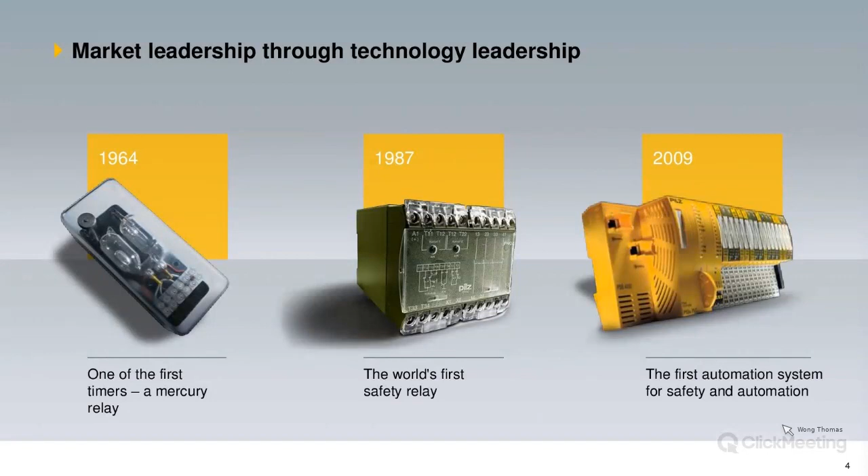For Pilz Southeast Asia, we're based in Singapore at the German Centre, near International Business Park. We opened in June 2016, so we're only 5 years plus old, a very new company for this Southeast Asia side.

Okay, let's go straight to the topic - nobody should be in the statistics. As you can see from these slides, in the first quarter of 2021, there were already 38 major injuries and 3 fatal injuries just from the manufacturing sectors. For machinery incidents, there were 16 major injuries occurring just in the first quarter of 2021. And in the fourth quarter of 2020, there were 19 major injuries and 1 fatal injury occurring from this.

From 2020 Singapore statistics, there was compensation of Singapore 74 million for these 16,000 cases. We do know that one accident is one too many, so our objective is to reduce it to almost 0, if possible.

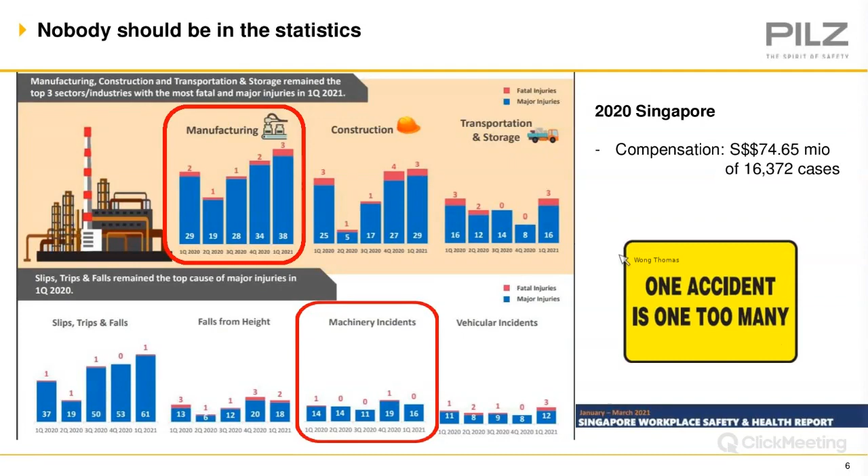So how do we get to this safe machineries and automations? We have a lot of hurdles, as you can see here. The first and most important hurdle is your risk assessment. After you've done your risk assessment, you move on to the safety concepts to design out or eliminate the risk, then design the actual system itself, followed by validation. You validate whether the risk is properly addressed and reduced, followed by conforming to your regulations, such as UL or CE markings. So let's move on to each of them.

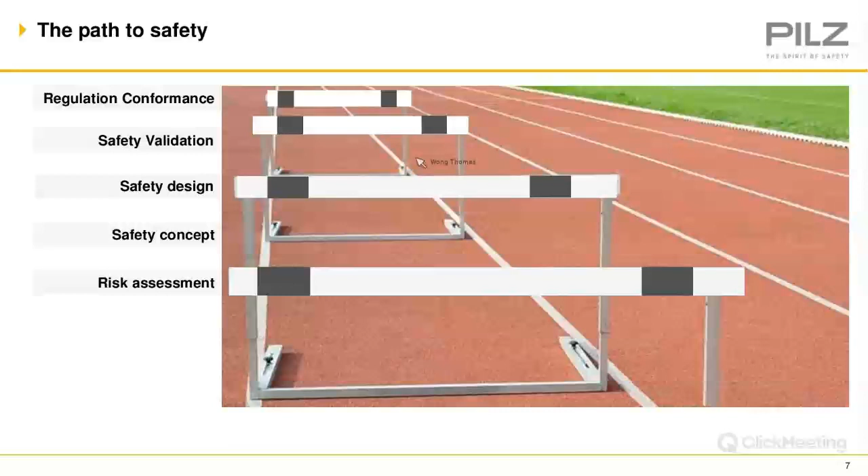Hurdle 1, risk assessment. The risk assessment must give attention to intended use. This is usually for task-based activities like teaching of robots, teaching of machineries, doing maintenance, settings, cleaning, etc. So it's not just the operator doing normal operations, it also depends on other tasks involved.

We also need to take note of unexpected startup, and we need to make sure we account for access by personnel from all directions. For example, you have electronic machines with an operator sitting there working on the product. However, you need to take note there could be people accessing from the side or behind him, and all this. So we need to take note of all risks from all directions.

And of course, any reasonably foreseeable misuse. Let's give an example of a machine with a light curtain installed. However, if the machine has a step by the side, a person could step on it and reach over across to the dangerous zone. To eliminate this, we could just remove the step that's built into the machine itself. So this is one of the ways.

To take note, risk assessment can be started when the machine is in the design stage. Actually, it's best to do it at the design stage, because you can eliminate or build your system safely from the start. This could eliminate a lot of additional costs to implement new or different kinds of safety measures for the machine. So it's always recommended to do it in the DRA stage.

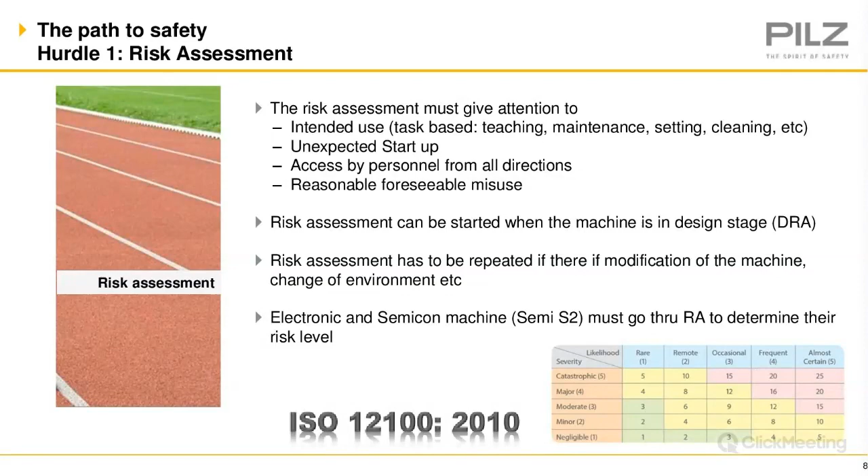The second hurdle, safety concepts. We have a few risk reduction measures that can be implemented. One, inherent safe designs. By doing good safe designs, you actually eliminate or reduce the risk itself. Some of the ways are to increase the distance from the hazard, such as having a conveyor belt deliver the items to the machine instead of an operator putting the product in.

Another way could be a modified design. For example, if the design was using light curtains or something too close, that should not be used, like for a semicon machine. They can instead have an enclosure design to make sure it's safe and prevents people from accessing it. Another way is technical safeguards, safety functions like guardings or SRPCS, which is your safety related parts of control system, following EN ISO 13849 for the performance level of these safety components, and ISO 10218-2 for the robot system itself, which is normally PLd and Cat 3.

So you do see some designs here for the guardings. This is an enclosure for a robot, and of course we have door switches, non-contact door switches, your e-stops, your safety controllers, and scanners, all of which can be used to provide the technical safeguard. The last but least recommended should be your information for use.

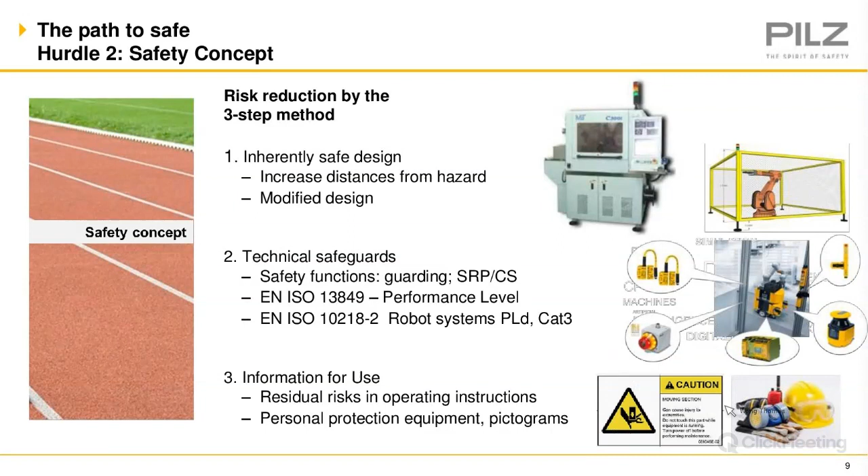So the next one, we are looking at human-robot collaboration according to ISO 10218 and also ISO 15066. There are a few ways for human-robot collaboration to work. One is by using a safety-rated stop: once you go into the zone, it will shut down the robot or stop it. The next is hand guiding using enablers, whereby you make sure it's safe by touching with an enabler in the other hand.

So there are two methods that are more popular now, which are speed and separation monitoring — I'll touch on this slightly more later — and also power and force limiting, which we'll also touch on slightly later.

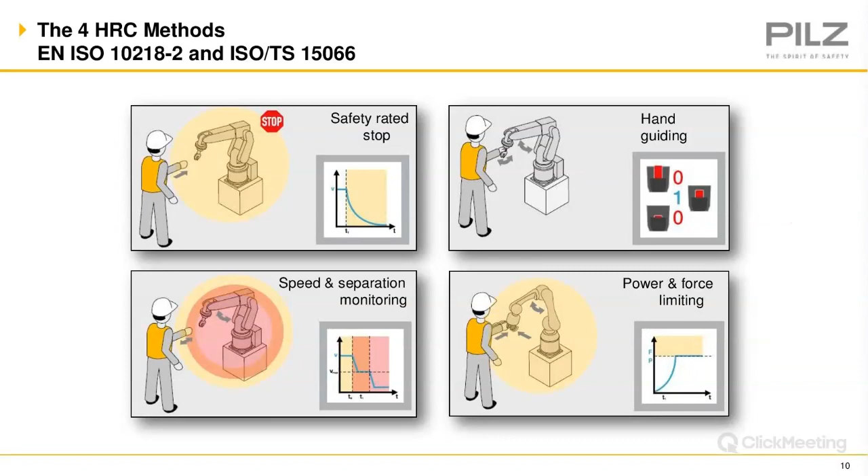Okay, for speed and separation monitoring, as you can see, there are different zones of different speeds. For example, a person walking into a danger zone — the yellow zone slows the machine slightly, followed by the orange zone another step further, and lastly the danger zone, where they push it to a very low operating speed. So this is one of the methods.

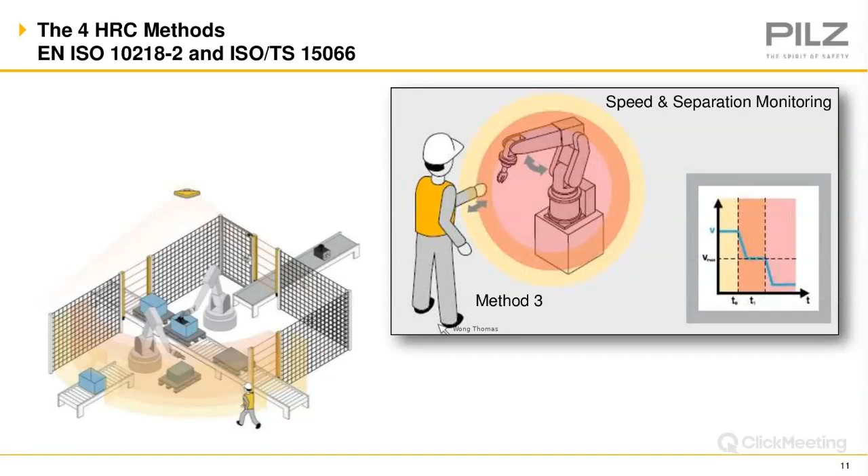The other method is the fourth method, which is power and force limiting. This actually allows collision to happen, so you can bang into the cobot itself. However, take note this has a limit on the power and force. There is a way to measure this, and later on we will touch on that as well.

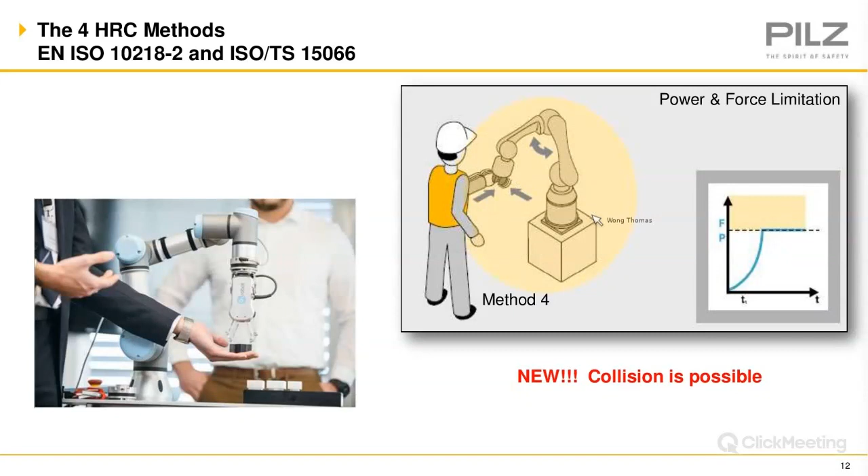Okay, so do you have a hurdle 3? This is your safety designs. Most designs are based on ISO 13849.

This is where you actually measure your performance level to measure the ability of the system to perform a safety function under foreseeable conditions. So what this means is that if the machine is more dangerous or higher risk, you need a better safety system to protect this machine from malfunctioning or breaking down, so that you can protect the person involved. Do take note, electronic and semicon machines actually refer back to this ISO 13849, so they must follow this kind of safety design.

So let's look at one of the ways to measure the performance level. S is the severity of the person injured — for example, this is dangerous, you can chop your hand or injure a limb, so it's actually severe. Then F is the frequency.

If let's say this is not so frequent, you only do it maybe once a year, so we put the frequency as low, which is F1. F2 is high, maybe a daily occurrence. Then the probability of this occurring — can it be avoided? P1 means you can avoid it, and P2 means you cannot avoid it under any circumstances. So let's put it this way: if ours is actually P2, you can't avoid it, so it will be a performance level D, the minimum requirement for your system level.

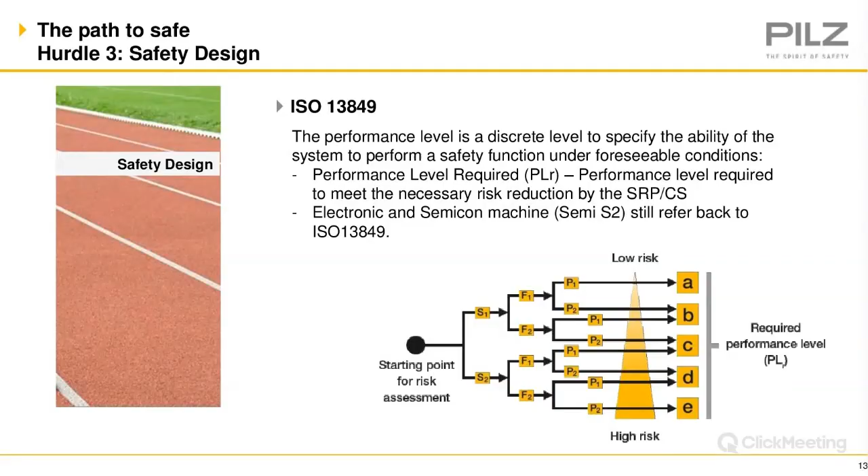So the performance level is a discrete measure of the ability of the system to perform the safety function under any foreseeable faults. It means the reliability of the safety control system itself. There are a few ways also to do this kind of architecture, so it doesn't mean you just have the idea of it — you need to design it out. So this is how you design it.

So this is a cat 3, and this cat 3 will be dual channel incoming, and then we have a cut off. There has a communication between the contactors itself, and also there's a feedback to the contactor. This is considered a cat 3. However, for cat 4, which is the highest level, you will have a dual channel for the incoming, and then you will have two contactors communicating to both to cut off. So in case, example, one contactor fails, the other one can still cut off. So this is how a cat 4 system will work. So this is almost a fail-safe system.

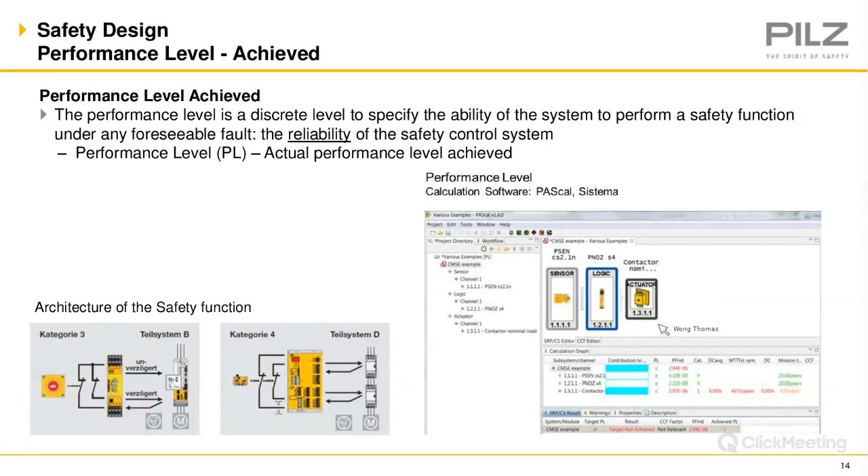And we do have a lot of software to actually do a measurement for this kind of Pascal or your performance level. So we have a software called Pascal and also a software Sistema. So this is a Pascal report. In here, you can see we have sensors, we have a logic, we have a contactor. So you can see that our sensors and our safety relays actually meet the requirement. However, the contactor itself doesn't meet the requirements. So a bit hard to see, but here is a target level, performance level is actually D. However, we can only achieve C based on this, so it does not meet. So meaning we must change out the contactor to something that's more suitable, or a dual channel contactor.

Okay, so we will move on to the hurdle 4 itself, is the validations. So validations includes post-measure risk assessment. This is to measure, after what you have done the risk assessment, is it meeting this? And then safety function assessment, which is your performance level achieved, and also your stop time measurement, this kind of measurements itself. And of course, we have to also validate the software.

So this is software validations, which is your safety PLCs and your safe robots. And we do need to take note of the installation of safety relevant components. And if the safety system is modified, a validation is needed again. Please take note of that. So for this, you can see this is a safety installation and fault validation kind of a report from Pilz. So that's what we do.

And also, how do you measure stop time measurements for a robot? So we have a light curtain here. A light curtain has a response time, and to link to a controller, there's some response time as well. And the safety controller also has a response time and links to your driver of your robot controllers. And lastly, to the robot, the stopping time of the robot. This whole thing is actually your stop time measurement. So we need to make sure the light curtain is placed a safe distance away from this robot that allows it to have time to actually stop before this person can actually reach the robot itself. So this is what we call a stop time measurement.

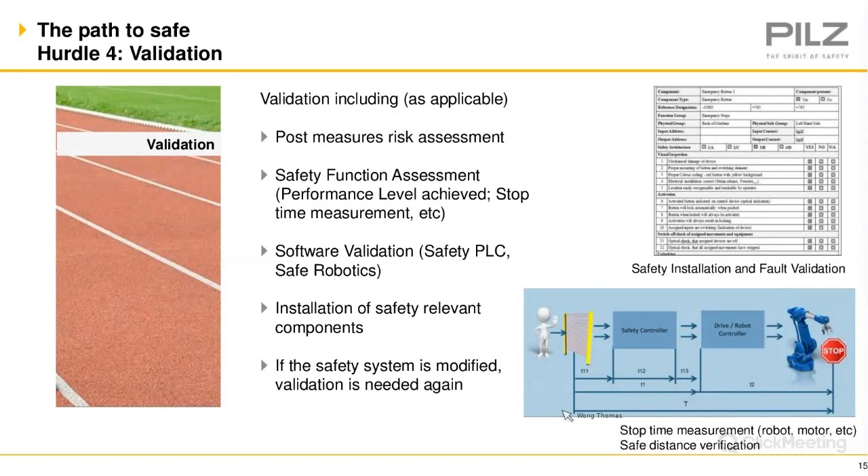Okay, just now we mentioned the validation of HRC, human robot collaboration. So we do the last method 4, there's a collision allowed. So it's based on this ISO 15066. Based on this, they allow collisions. So imagine this is a robot arm. The robot arm on collision will activate the fail-safe limit robot when it reaches here, and it will definitely stop when the robot reaches here. So this is the limit of the robot. So by this measurement, if it's within this threshold of ISO 15066, it's allowable. However, if this measurement is higher or exceeds this threshold, then you just need to calibrate to a lower level for the pressure and force of this cobot itself to meet the requirement. We will have a device data that I will touch on, which will show you how to do this.

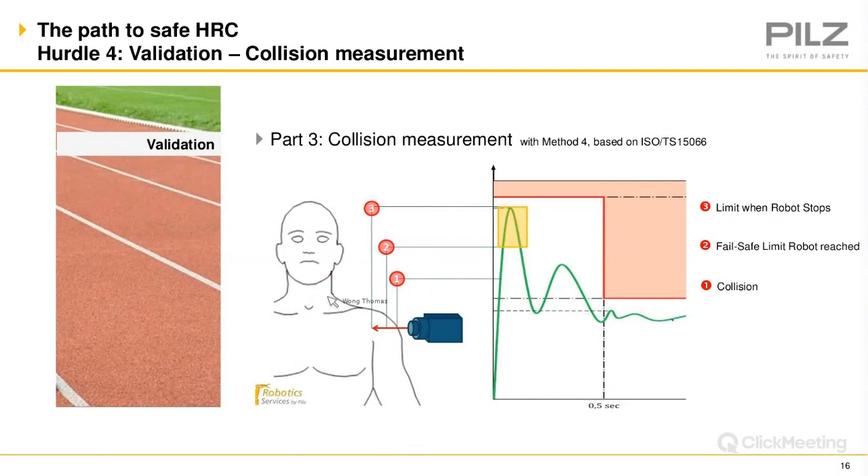So just now, we just went through the safety life cycle. So from application analysis to your risk assessment, to your concepts itself, to your designs and also implementations. And also, we need to have some markings like CE markings or UL or whatever certifications. And lastly, we need to make sure we also provide training and technical support as well. So this is the complete life cycle of safety.

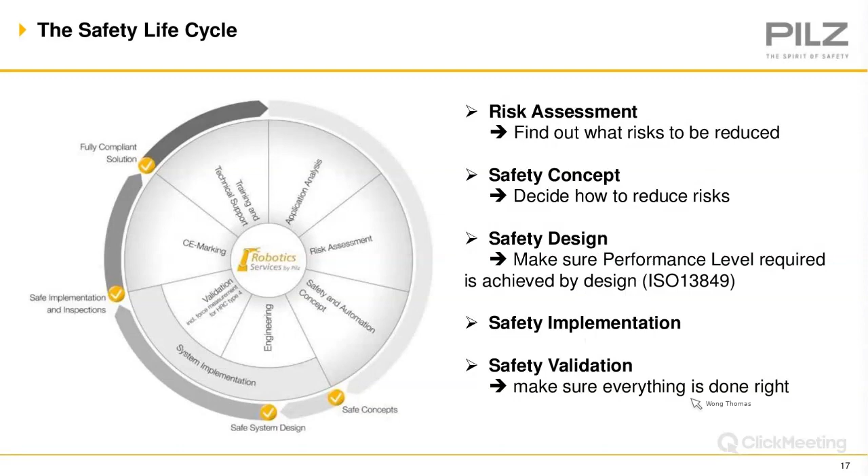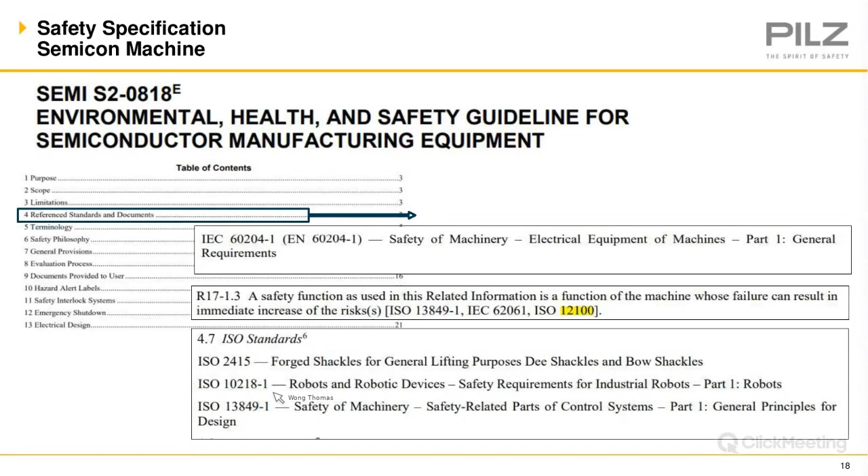Okay, just take note that for this semicon machine itself, the Semi S2, they are in reference to also our ISO or IEC standards. So IEC 60204-1 is one of them. And then we also have 12100 and also 13849 and 10218 also mentioned in this Semi S2 standard itself.

Okay, so we have two questions. One, we implement all safety measures - cobot, e-stop, safety sensors, guardings - do we still need to do risk assessment? The answer is actually yes, because risk assessment is the starting point of all measures. Without knowing the risk itself, you will never be able to implement the safety measures. So we always need to do a risk assessment regardless of whether you are trying to implement any safety measures.

Why do we need to use safety components? Is PLC and normal automation components not safe enough? The answer to this is yes and no. Why no? Because sometimes during the risk assessment, we assess that the machine is very safe - it's performance level A - so we do not actually need to use any safety components. However, if we do a risk assessment and find that it's performance level D, you will highly need to use a safety component because you could not achieve this with a normal PLC or normal automation component.

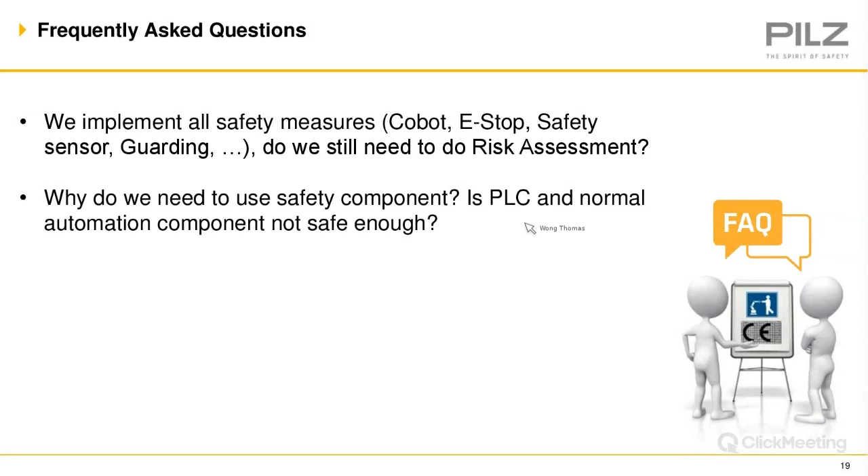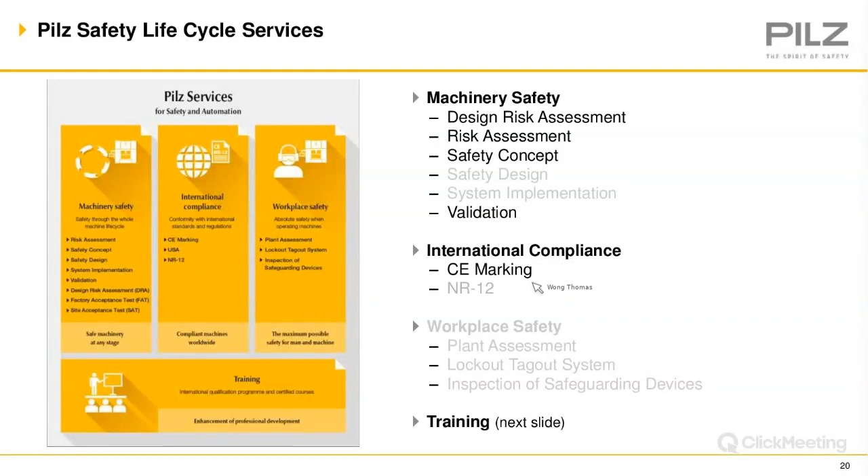So what does Pilz do? We're actually able to provide you some of these services. This is one of the services we can provide, which is your design risk assessment, your risk assessments itself, your safety concepts, and also your validations. We are able to do all this, and even CE markings - we are able to do CE markings as well, and trainings.

So we do have some trainings here. We've got fundamentals of machinery safety, we've got also risk assessment for your fundamentals - this is the more popular course. For advanced, we do have the design safety designs like ISO 13849 - this is one of the popular courses as well. And the most popular course will be your CMSE, your Certified Machinery Safety Expert course itself. This one is actually internationally recognized and issued by TUV Nord, not by us.

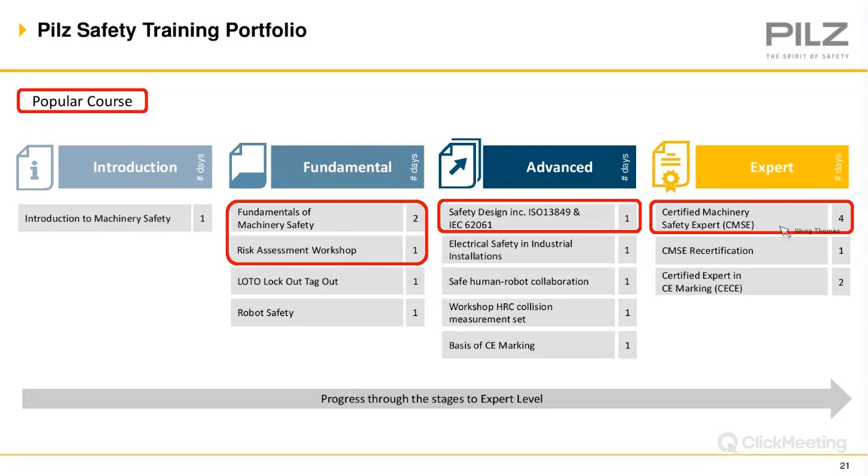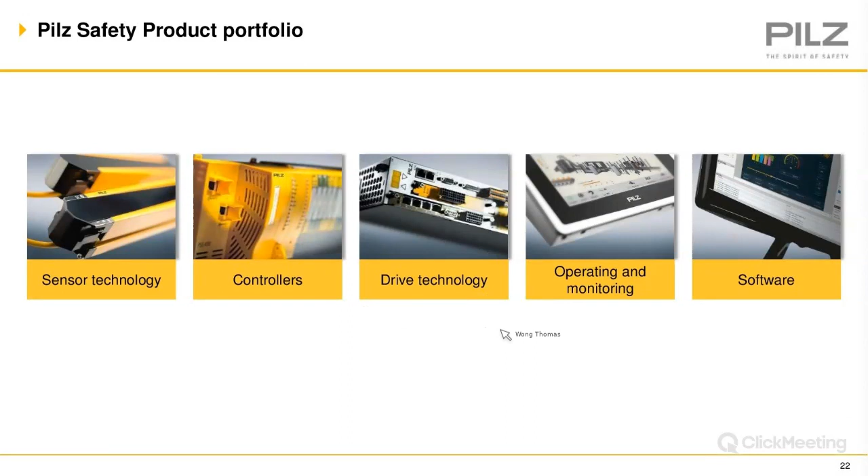For our product base itself, we have sensor technologies, your controllers, your drive technologies, your operating and monitoring systems, and also your software.

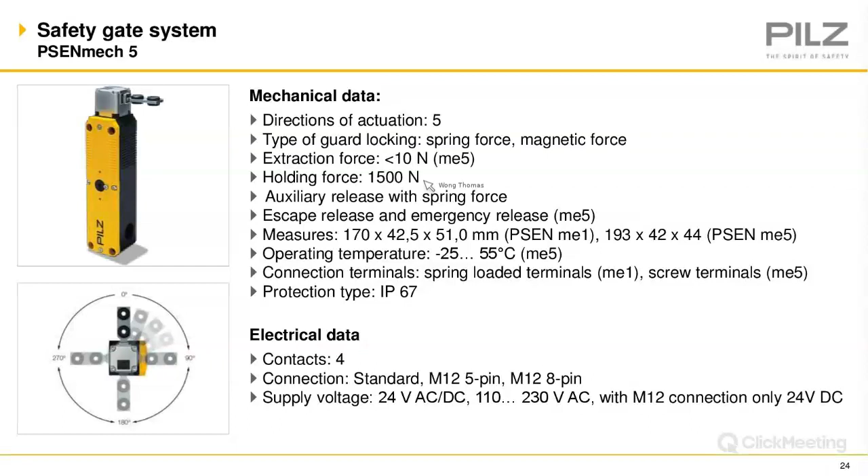We will touch more on this newcomer - this is our PSEN ME5. So this guy is one of our better sellers, and actually has spring force and also magnetic force up to 1,500 Newton of holding force itself. So this is something we are promoting.

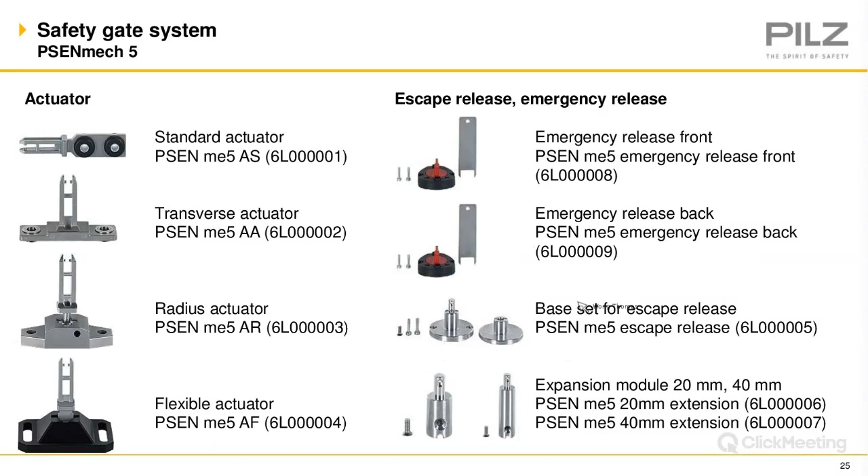They do come with a lot of actuators, as you can see here, from your standard actuators, your radius actuator, and also we've got escape release and also emergency escape. So there's a lot of accessories that it can be used on.

And we do have some application stories for this ME5 itself. My customer is actually building many low-level machines for electronic and semiconductor industries. They've been using our competitor's O brand for the door interlock for many years. After testing our door locks, they're extremely happy with it. So what is the advantage? There is a metal head - this is the metal head as compared to our competitor that's using a plastic head. And of course, our PSEN me5 AR is actually better functionality than the O actuators itself. And of course, lastly, the most important point is very attractive pricing. So if you are interested, let us know.

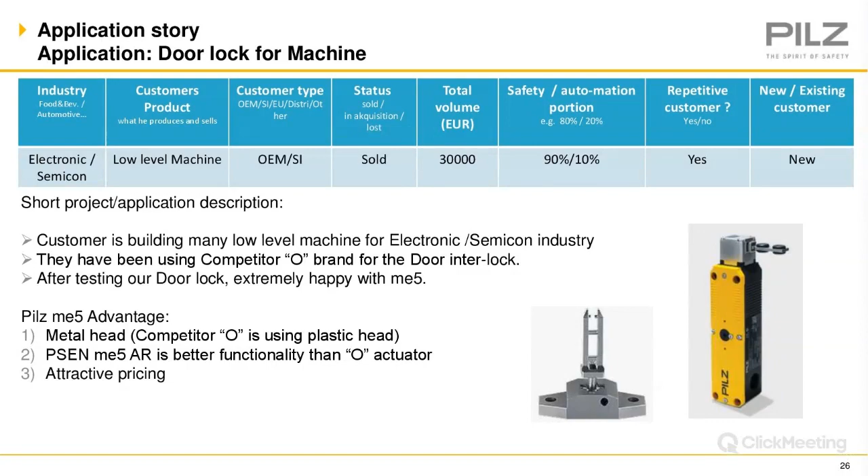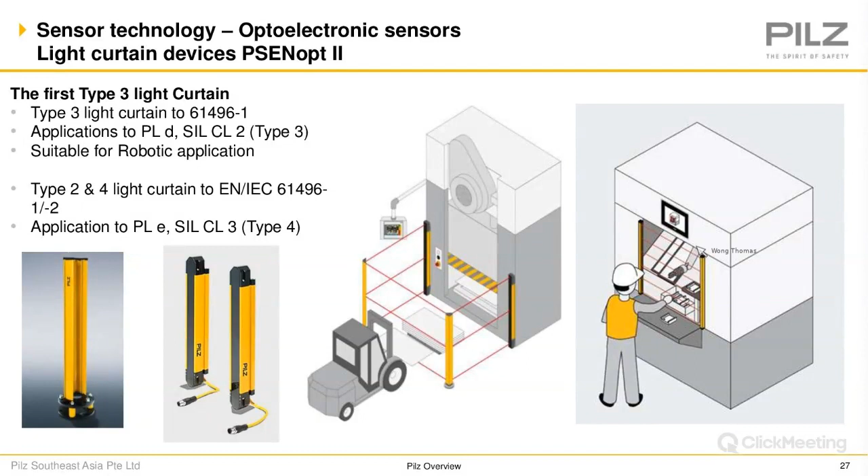Okay, the next one will be light curtains - so this is standard light curtains itself. In the market, you will see a lot of Type 2 and Type 4 light curtains. However, do take note, we are one of the first to come up with Type 3 light curtains to cover the gap in between. So it's applicable to PLd, CL2, which is suitable for robotic applications. So we have Type 2, Type 3, and also Type 4 - we have all types. If you're interested to know more, you can contact us. And you can see from these light curtain functions, one of them is for robotics as well, using PLd, which is Type 3.

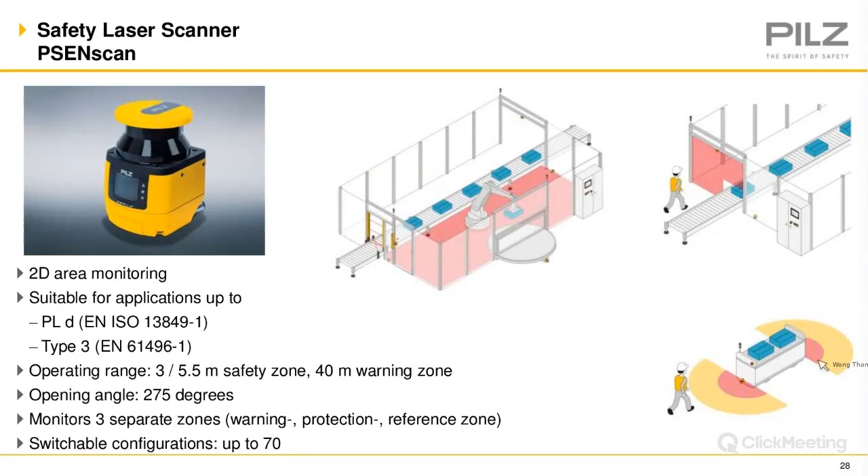So this is one zone, this is a danger zone, you can put it there. Or you can have it act as a light curtain - it's also able to function as that. And it can be used for AMRs and AGVs as well.

So this is just one of the functions of this laser scanner. This is the danger zone, and this is the warning zone itself. So if a person walks in here, it will know that somebody is coming in. Once it reaches the red zone, it will actually stop.

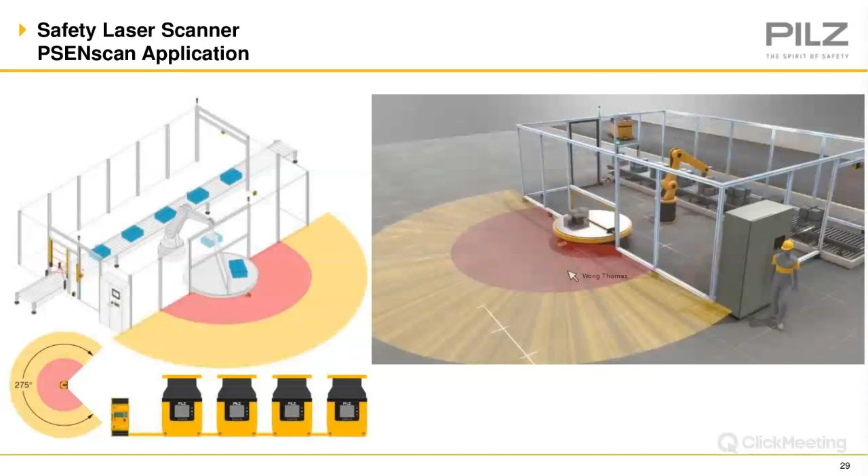We do have some application stories as well for this. My customer is building a complete solution for their end customer, a product manufacturing company. They want to detect any person inside the robot operation zones or when walking to the stations when the robot is in operation - there are some robots behind here that you can't actually see. So they have installed quite a number of scanners to protect this area and prevent people from standing there when the robot is in operation.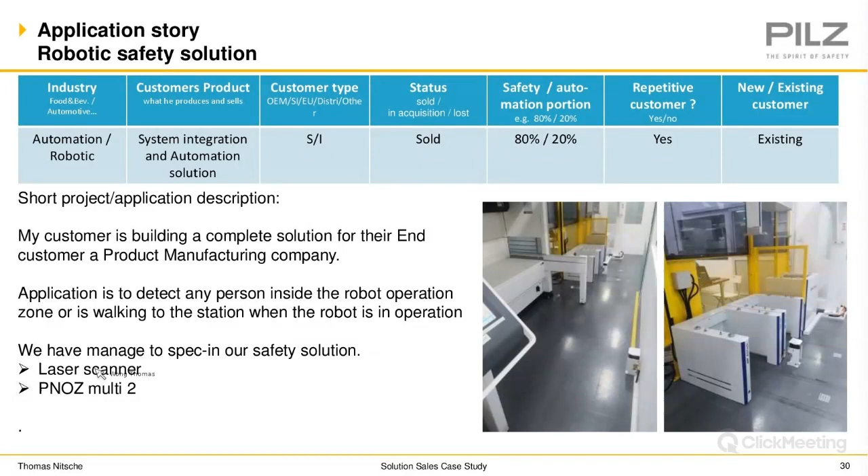So what they are using is actually our laser scanners and also our PNOZmulti 2.

Just now I mentioned about the robotic measurement - this is actually our Pilz Robot Measurement System, PRMS. This is a collision measurement set for human-robot collaboration. You can rent, sell, or buy this. What it does is record pressure and force on this machine. We use this to measure and then scan it to the computer like this, and they can measure whether it's within range or out of range. This is also based on ISO 15066.

Just take note, if the manufacturer tells you the robot is safe, however once you change the applications - for example, when the measurement was done for pick and place, and you change it to insertion or a different kind of application - you need to do these validations again. Because there's no such thing as a safe robot, only safe robot applications. So it's based on the application itself. Do take note of that.

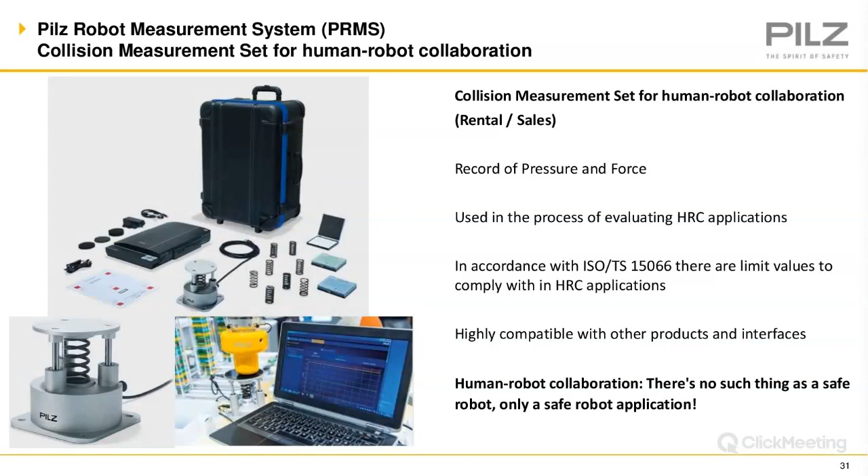We also have safety relays - our PNOZ X and Sigma series, as well as a few other ranges here. They can actually connect to your safety gates, e-stops, two-hand controls, or light curtains, and all this is also able to function as well.

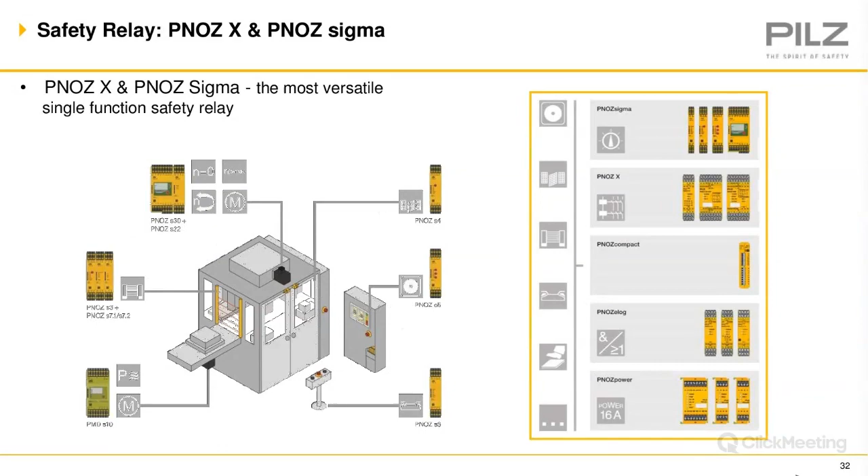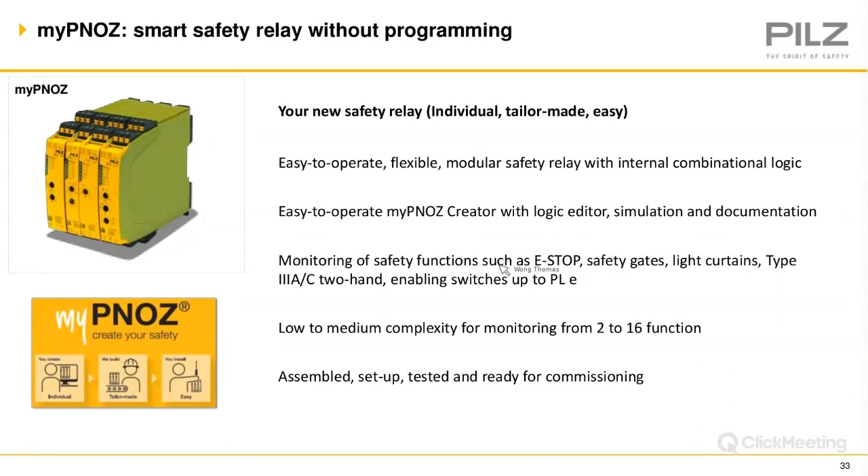We do have a new product called MyPNOZ, which was launched not long ago. This functions up to 2 to 16 functions that you can put into this - it's actually a customized kind of safety relay that you can configure. I'll use this to explain to you: you create it using the MyPNOZ Creator online, and then use that to simulate what you want. And once you are happy with what you have, we can also help you with this.

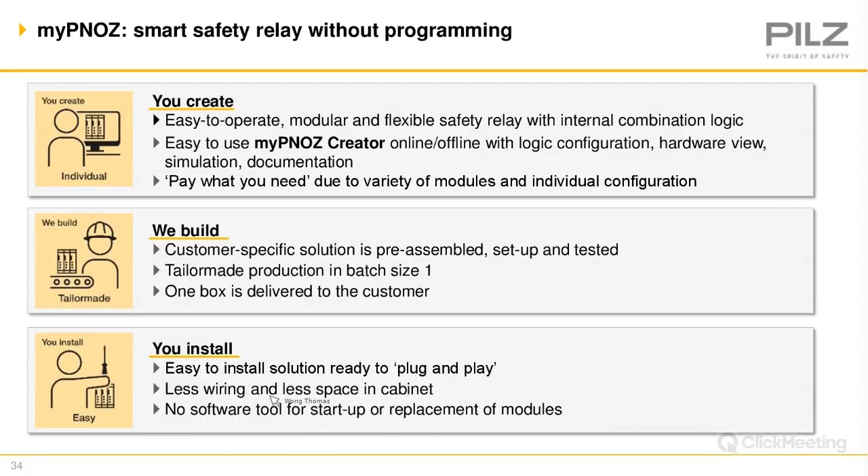Then you let us know, and we will build it for you, set it up and test it for you. After testing everything, we will send it to you in one box. So what you need to do is just install it - it's a plug and play system. There will be less wiring and also less space needed in the cabinet. And most importantly, you do not need any software after that for starting up or even replacement of modules.

So for this, I also have an application story. This is a 1 to 4 emergency stop in series kind of application - 2 safety inputs, so a light curtain and safety door locks, and 2 times semiconductor output is needed. They are currently using a brand X software programmable safety relay, but the customer needed something easy to install because the worker is unskilled and they don't want a program.

So what we offer to them is actually this solution, where you can see this is the e-stops, and this is the safety light curtains and the safety doors itself with 2 outputs of semiconductor. This is just a very simple kind, whereby they can use this to replace the programmable safety relay.

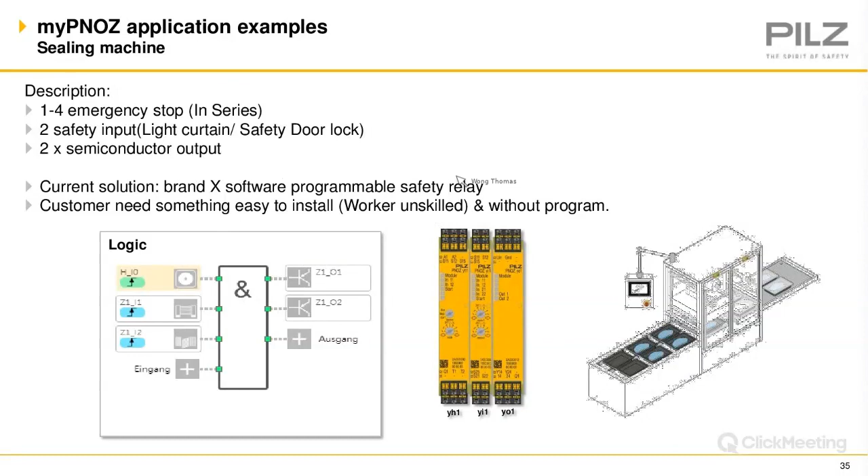There is also a PNOZmulti 2, which is actually a programmable safety relay. This is actually a top seller for us. It's programmable, as I mentioned, so it comes with a program. It's up to performance level E, according to ISO 13849. It's also very easy to configure, and if you want to change the program, or you have a very complex system, this will be highly suitable for you.

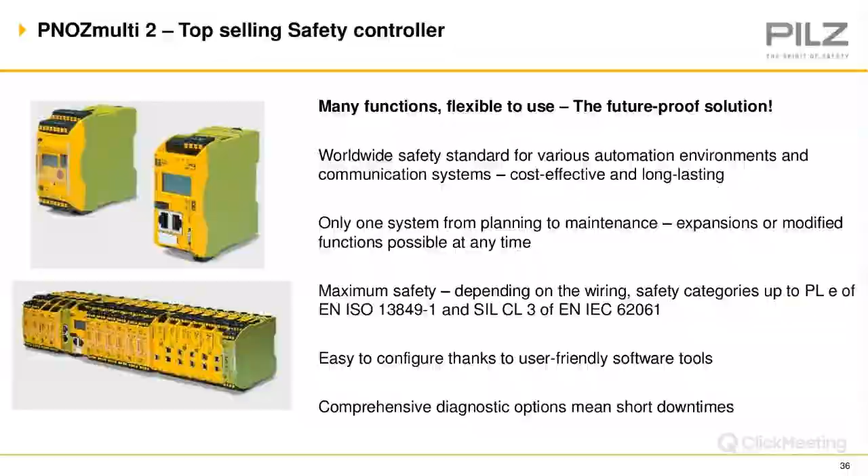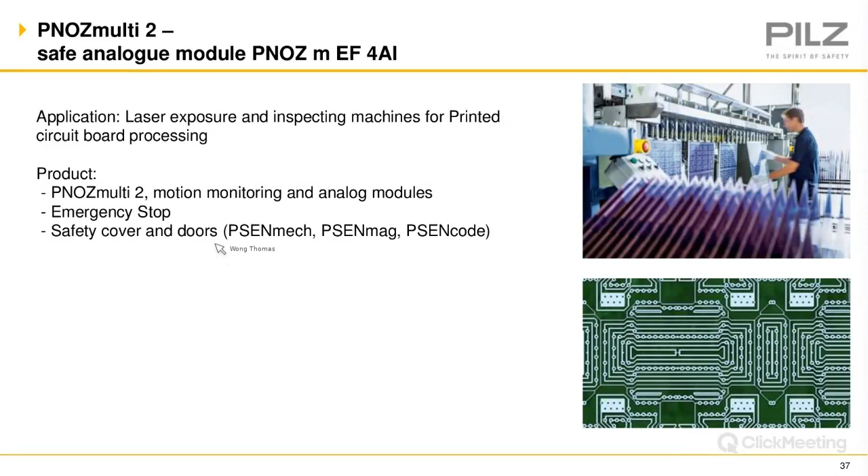We do have some applications for that as well. We have laser exposure and inspection machines for PCB processing. They are using a PNOZmulti 2 that comes with motion monitoring and analog modules, and of course adding in some e-stops and also safety covers and doors for these applications.

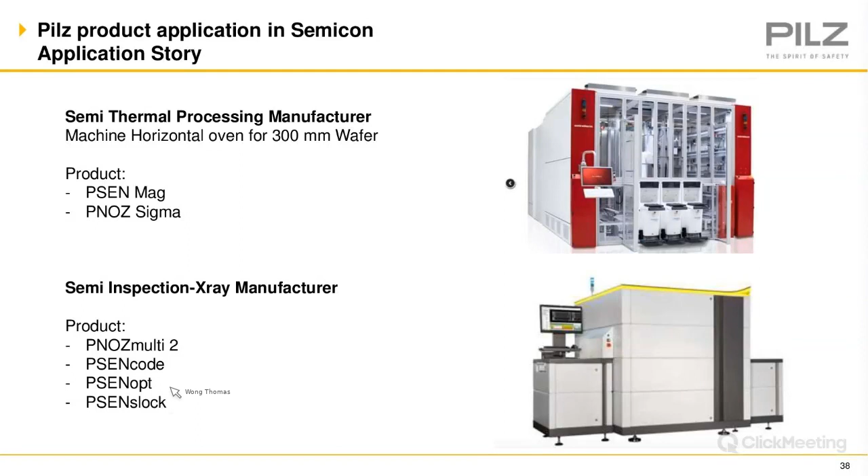We do have some application stories also for semicon. We have a semi thermal processing manufacturer, a machine for horizontal ovens for 300mm wafers. They are using our PSEN Mag, our non-contact door switch, and also PNOZ, our safety relay. We also have a semi-inspection X-ray manufacturer using our PNOZmulti 2, our PSENcode, which is one of our non-contact devices, our PSENopt, our light curtains, and also PSENslock, our door locks.

We have also applications in semicon for special applications such as gas. There are gas cabinets, which are safety devices for safely supplying special gas for the semicon industry, FPD, LED, and also solar manufacturing processes at a constant flow rate and pressure. The requirement for most of these products is to be installed in gas environments, so some devices are required to meet explosion-proof designs. One of the products we managed to sell them is our PNOZmulti 2 and also our PSEN Mag, a non-contact magnetic switch, but this is EX rated, meeting the customer's requirement. Here is one of the pictures of it.

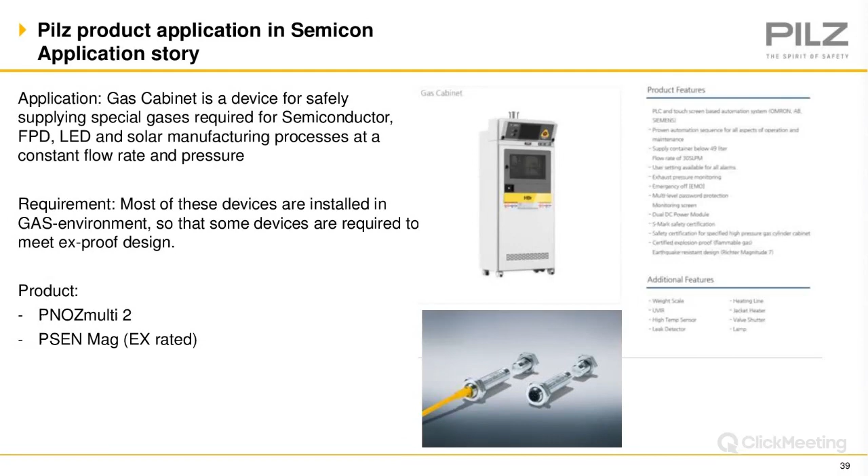So I've come to the end of our presentation. Do take note, we are the ambassadors for safety. We make sure that your staff, your company's most valuable assets, can work safely and free from injuries.

We will move on to the Q&A session. I have received some questions.

What if a robot is integrated inside the electronic machine? Do we need to have a risk assessment? Yes, for sure, we need to have a risk assessment for the robot itself. The whole machine needs to go through risk assessment according to ISO 12100. However, the robot parts need to be referred to the standard ISO 10218-2, for the robot system itself. This standard will explain how to assess the interface between the robot and the surrounding machine parts. So did I answer the question?

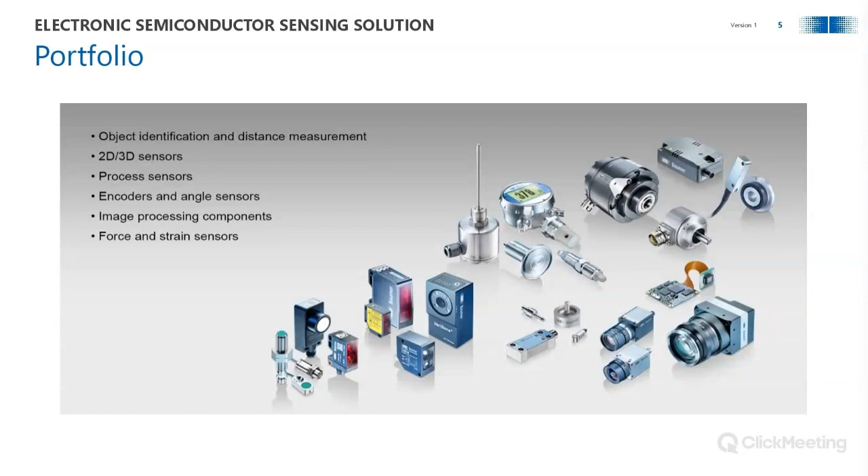Baumer is a sensor company. But sensor in Baumer's term does not just talk about proximity sensors. In Baumer's world, sensors include not only proximity sensors, measurement sensors, and advanced sensors, but also force and strain, precision switches, process sensors, encoders—both industrial encoders and heavy duty encoders—and last but not least, industrial cameras. So in Baumer's world, sensors mean much bigger.

Semiconductor timeline: way back in our grandparents' generation, we have the first transistor, and the radio transistor was invented. We have the digital clock, the first memory RAM invented back in the 1970s, the first arcade games—I'm not sure how many of you recognize this—and personal computers, the 8086, 286, 386, 486 computers, and of course the mobile phone as big as a 1 liter water bottle. Moving on to today's flip phone from Motorola, with smartphones.

In today's context, we have not only plasma to LCD to OLED TV and monitor displays, but also supercomputers. So electronic semiconductors have evolved greatly over many decades.

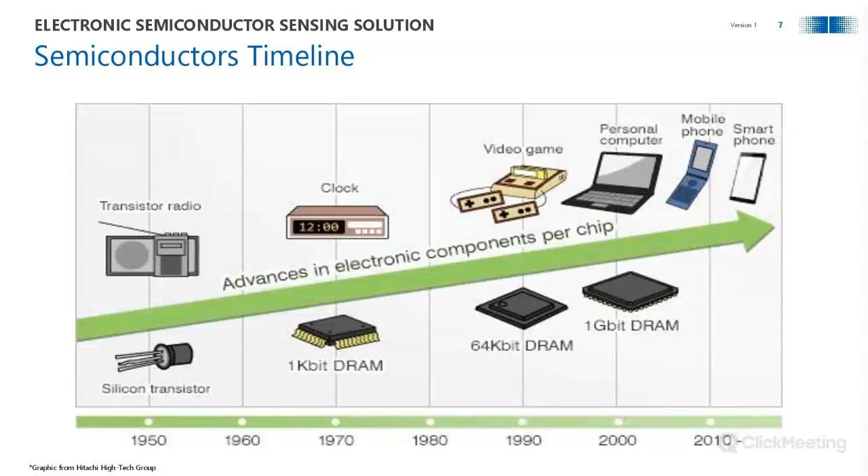With the evolution also comes advancement in the chips and all the chip handling and packaging processes. For wafer level packaging, over the last 10 plus years, you can see the development of wafer level packaging, mobile phone processors, CPU and GPU chips getting more and more powerful, and even high-end mobile processors are more powerful than some basic level entry personal computers.

The advancement in radio frequency chips and communication chips—Bluetooth was invented less than 20 years ago, and Wi-Fi standards have improved so much. We also talk about moving on from 3G to 4G, and now we talk about 5G. So the chips and packaging have changed. Even automotive—all the aircon control, temperature control, fan control, car control systems, the console—now all cars come with touchscreens or displays. So the chips behind all this are all semiconductors.

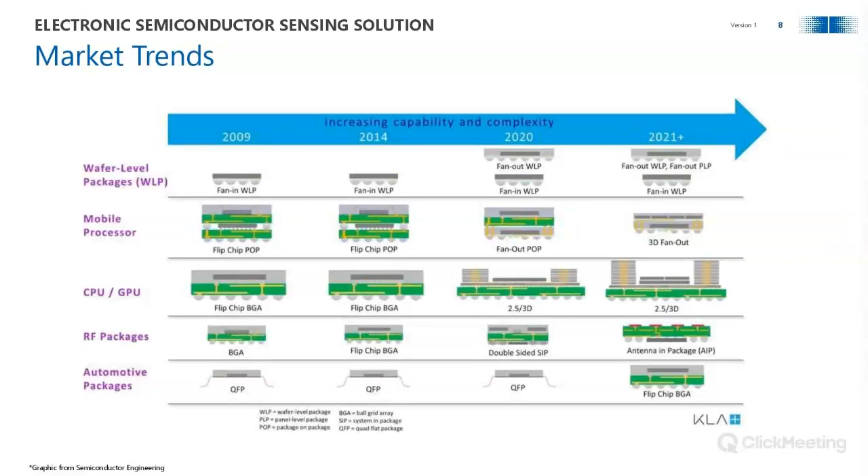So what do we hear from the end users, our customers? From the foundry wafer process to the back end, the wafer size has been moving up from 200 to 300 mm, and in development, 450 mm. The node size has gone down from 60 nano all the way now to 10 or less.

So the equipment used to manufacture has to—first, talk about downsizing—be able to handle bigger wafers, handle thinner wafers. Even the functionality of the machine has to be improved to handle more advanced chips, down to the back end, the packaging process, from standard die bonder to flip chip bonder, 3D bonding, up to the PCB level, from two-layer PCB to multiple layer PCB, from standard through-hole mounting to SMT mounting and ahead.

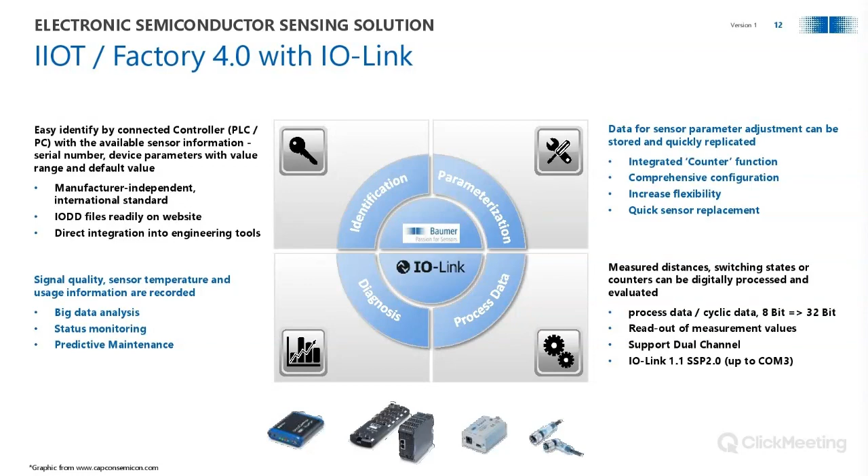So with the adoption of IO-Link or newer communication connectivity like OPC, we move on to the offering from Baumer for various semicon applications, machinery, or processes. On the back end, the molding machines.

You can have the temperature sensors and pressure sensors. The temperature sensor monitors temperature consistency, and the pressure sensor monitors the consistency of pressure when pumping the liquid mold into the die, into the injection molding mold, into the cavity. Of course, we also offer cavity pressure sensors to enhance the monitoring.

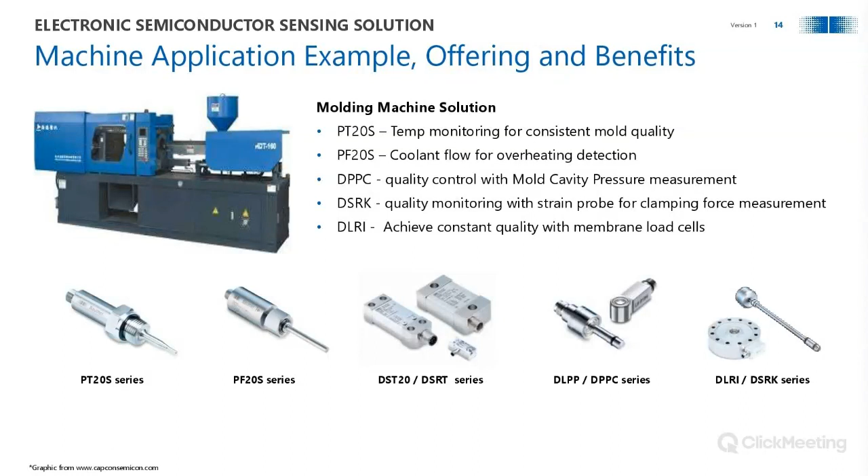We also have the strain probe for clamping force, and also membrane load cells to check on overall quality. Apart from the sensors used, we also have level sensors in the tank, and also encoders. So Baumer's solution is comprehensive for such molding machine applications.

In terms of feeder technology applications in the back-end assembly, whether at the PCB level, the device assembly level, electronic device assembly level, or at the packaging level, there is always some form of feeding technology or mechanism involved. In this illustration, we have the vibratory bowl with the auto feeder. The various Baumer sensing solutions can be adopted to enhance and improve the overall monitoring, controls, and productivity.

The ultrasonic sensors are typically used for level control for both the feeder and the tanks. The encoders are used for conveyor feedback, tracking, object tracking, or even to trigger the cameras, the smart visions. And of course, vision is used to check product quality, orientation, alignment, positioning, and sorting.

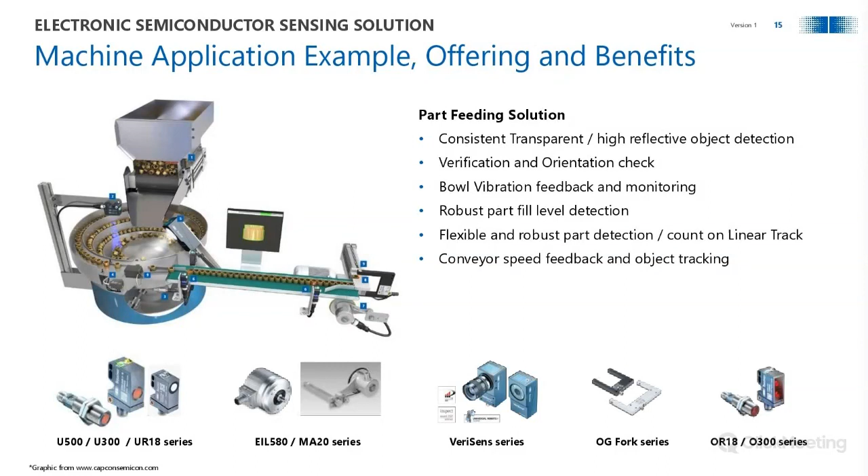Moving on to the XY stage, which is very common in all handling machines, we have the offering of the precision switch, the MY-COM, to allow precise homing of the stage. This also acts as a feedback loop for the servo motors.

Next, we have object sensing along the machine's handling, whether it's a lead frame handler, tray handler, strip handler, chip handler, wafer handler, or die level handler. Photoelectric sensors are typically very common and a necessity to detect presence or absence, and for measurement-type applications, to detect the position or height of the chips, the die, or the parts.

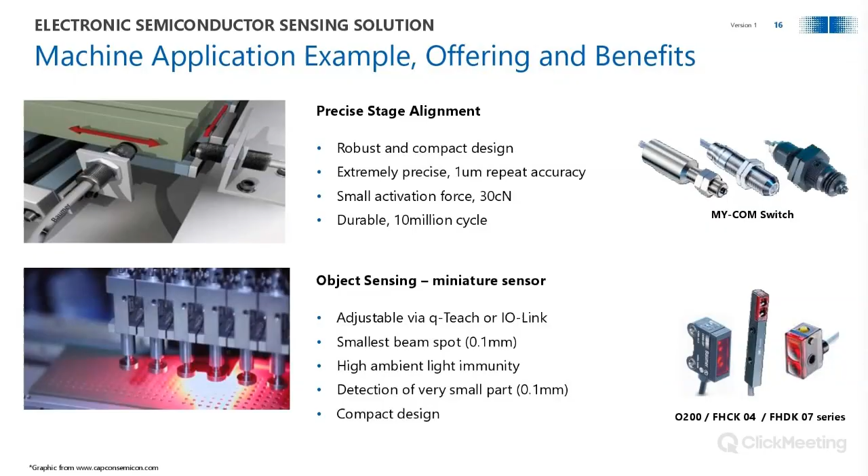Baumer range of industrial cameras is also widely used to help customers in terms of quality control. In the electronic semicons, machine vision is widely used on the machineries used to manufacture from the wafers down to the complete chip.

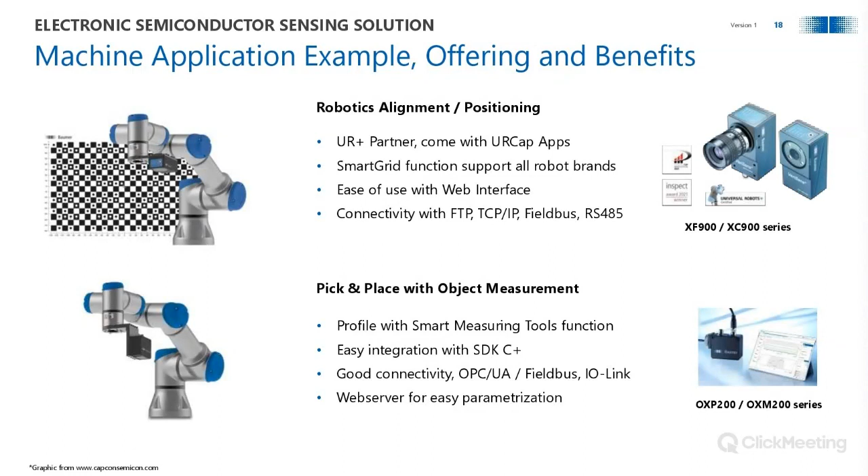And so this is how Baumer solutions will help to enhance and improve the quality control or the productivity of the customer's machines. And moving on to the summary, Baumer sensor solutions can offer reliability.

For the photo sensors and laser measurement sensors, they are able to detect very dark objects, they work well, and are able to detect even if the object changes from dark to white to bright. So it's very reliable. In today's environment with LED lights, LED light has become a nuisance to the sensors because of a lot of false detections. But Baumer's range of photoelectric sensors have extremely high ambient immunity, meaning the sensor will perform robustly and consistently.

For the ultrasonic sensors, it comes with the Peek film protecting the transducer. In semicon environments, every time they have to do an alcohol wipe down, and we heard from customers that the transducer of the ultrasonic sensor always gets damaged after some time due to the wipe down procedure. So the Peek film routed over the transducer helps make it robust and durable.

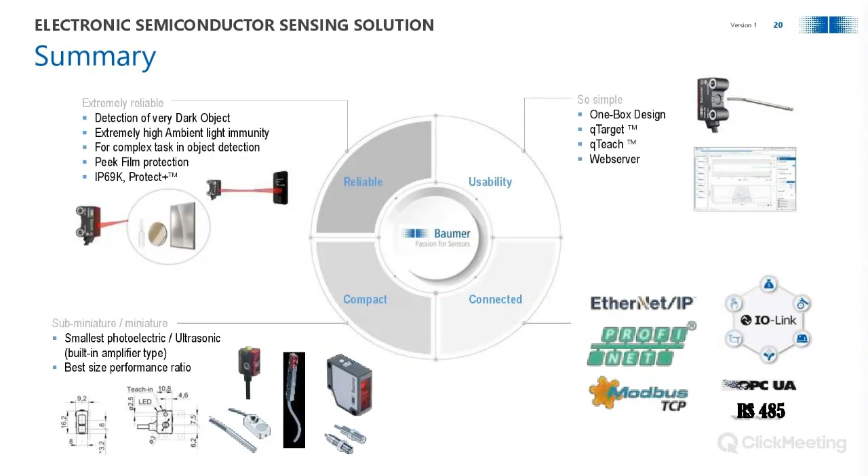So Baumer sensor solution offers all these benefits and helps our OEM customers to deliver their machines for the end users based on their needs. For the semiconductor metrology process, regardless whether it's on the foundry level, all the way to the back-end chip level, or to the PCB level, Baumer has the solution for you.

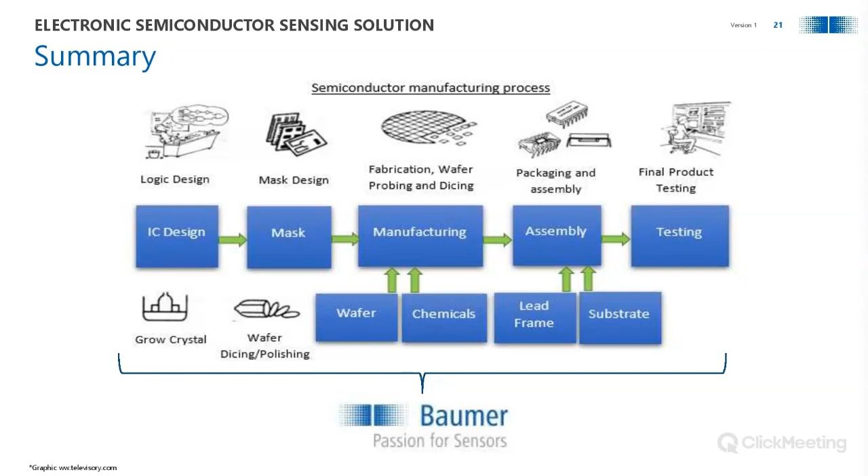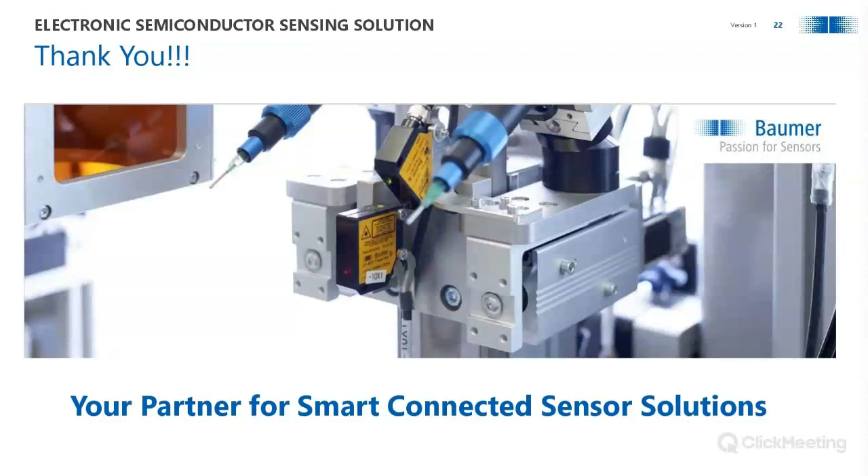As we end my presentation today, please remember, Baumer is your partner for smart connected sensor solutions. I'd like to thank everyone for staying with me for this. Now we are open to questions.